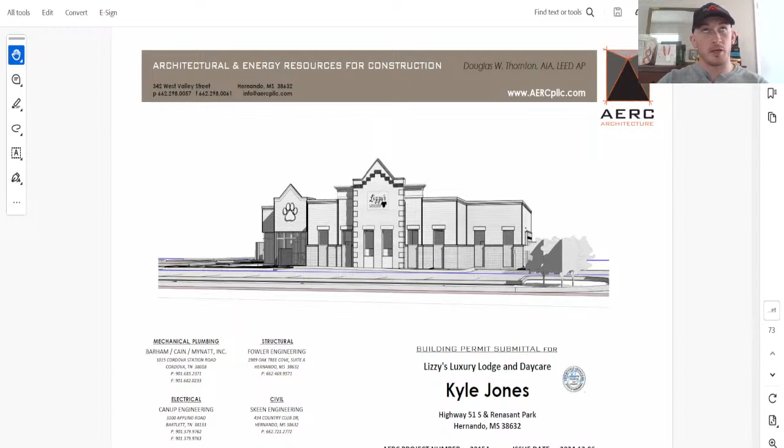All right, so we're going to be going over a live estimation. This is Lizzy's Luxury Lodge and Daycare. So if y'all don't know me, my name is Brad. I've been doing civil and dirt work excavation estimation for 5 years. I now teach everybody else how to do it.

So first thing we're going to do is we're going to go to our civil plans. All this stuff typically is relatively important, but not for us. So here's our existing conditions and demo plan. Let's just take a look around real quick. Doesn't look like there's a ton. It doesn't say anything about clearing or anything throughout here, so I'm just not going to worry about it.

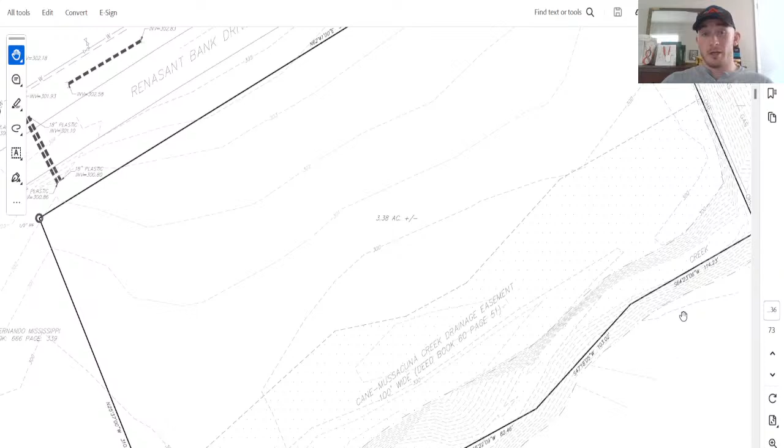All right, so here's where we can get into our first little bit of stuff. This is my site plan. And what I did already is I made some notes with this light duty concrete, heavy duty asphalt, all that kind of stuff, with how much base, because I don't do asphalt paving, but I'll lay all the base and stuff because I'll do all the grading.

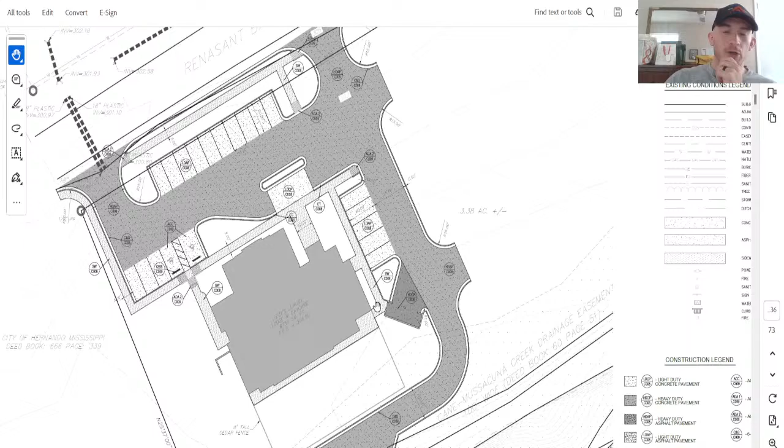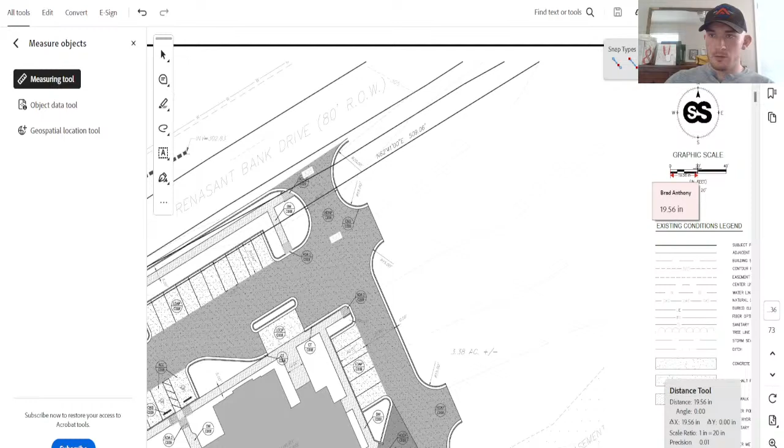So what I'm going to do, I'm going to find my scale. So 1 inch equals 20 feet. I'm going to hit my all tools and find my measure objects measuring tool. Change my scale by right clicking. 1 inch equals 20 feet. Let's go ahead and double check our measurement. 19.56, close enough.

All right, so first thing I want to do is I want to find the heavy duty asphalt, HDAP. So this says HDAP, so that's what I'm going to measure. I'm going to get to my area tool. I'm going to get a good little zoom in. And let's go ahead and trace. So this is just a quantity takeoff. I'm not going to be showing any pricing or anything like that, but if you're new to bidding off of plans, I think this is a very beneficial thing for you.

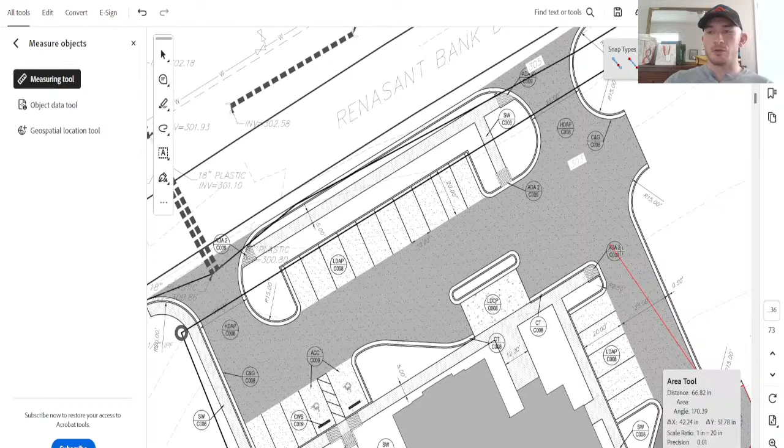So let's go ahead, just outline all this stuff. Oops, wrong way. Nothing remarkably difficult going on, but this is all the necessary evils to be able to figure out how to price a job. So I come here, I come across. So after we do this heavy duty asphalt, I think I remember it being 8.5 inches of base. So what we got to do is a little bit of conversions.

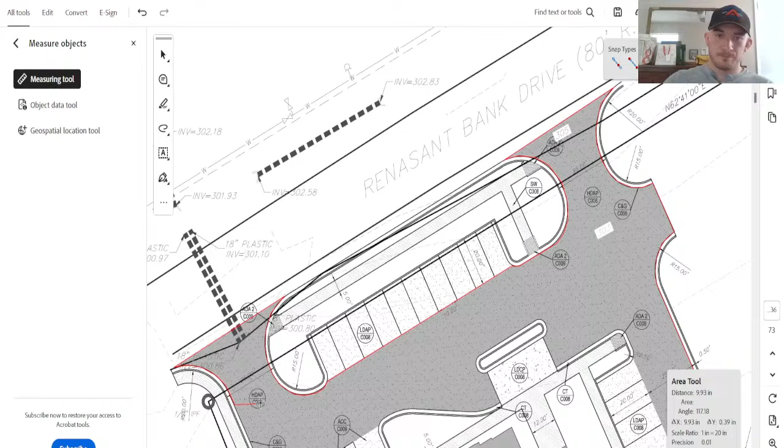Go ahead and follow this little concrete island. It doesn't have to be remarkably exact, but try and get as close as you can. Typically the drives are always heavy duty and then the parking spots are light duty. And connect. So we're at 16,450 basically. So I'm going to go ahead and take my pen, 16,450. Now, I'm going to pull up my calculator real quick.

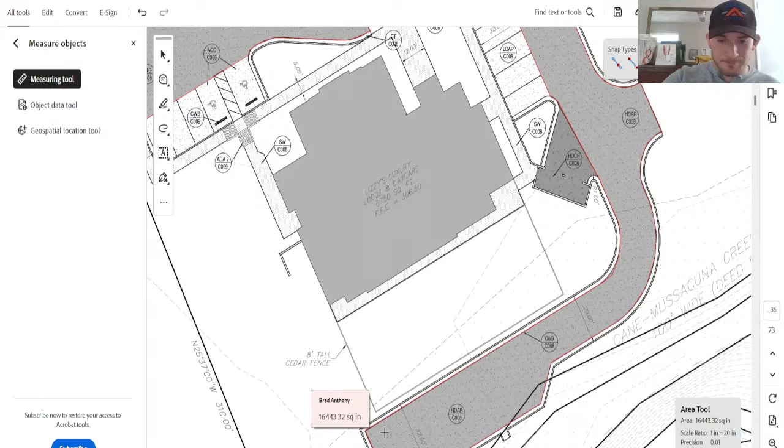Let's see, calculator. So 16,450. Now, I have it written down here that for our asphalt, it has 8.5 inches of compacted DGA base. So if you don't know what 8.5 inches is, I'm going to do 8.5, divide that by 12, because there's 12 inches in a foot and we have 8.5 inches. 0.708. So I'm going to do 16,450 times 0.708 equals this.

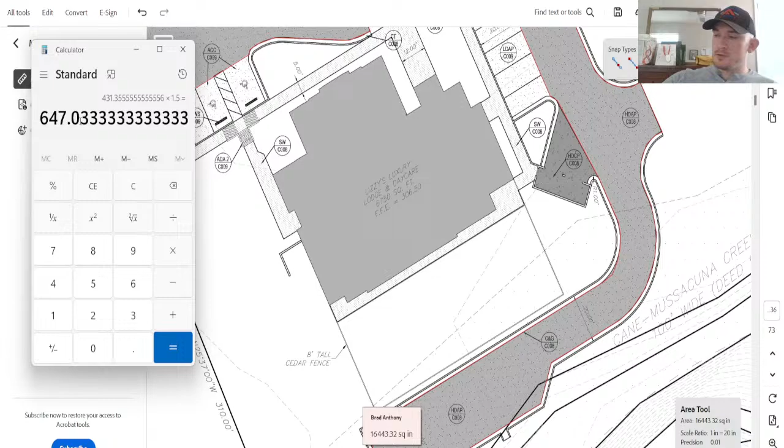Now this is my cubic feet because we have length and width throughout all of this. I'm going to divide by 27. That's going to give me my cubic yards. Now, we have to hit a compaction percentage. So with typical crushed stone, I use about 50% more. So I multiply by 1.5. So I'm going to need about 647 tons for the heavy duty asphalt. So I'm going to go ahead and make a note, 647 tons, HDA.

So now we just do the same thing. I'm going to go back through, I'm going to find all these light duty spots, and I'm going to measure them out.

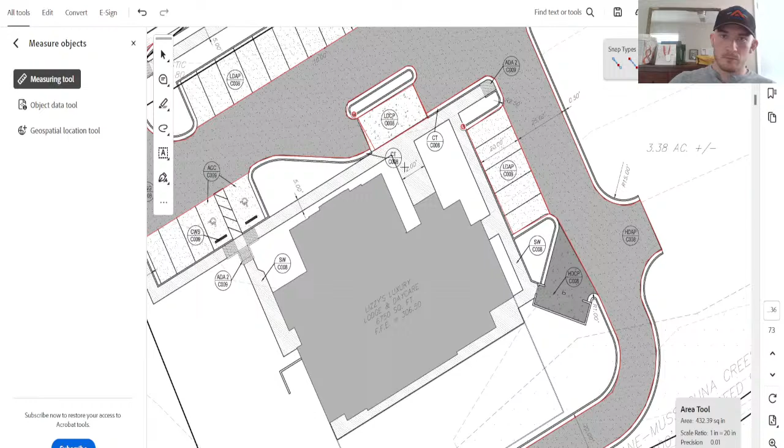Light duty concrete paving. I missed a little bit on here, but that's okay. Some of this ADA stuff gets a little bit complicated because they want you to have real specific compliance stuff, but I don't typically worry about it because that's something that I can figure out in the field. So you can see I'm going a little bit into this curve. I don't think it's going to make that big of a difference.

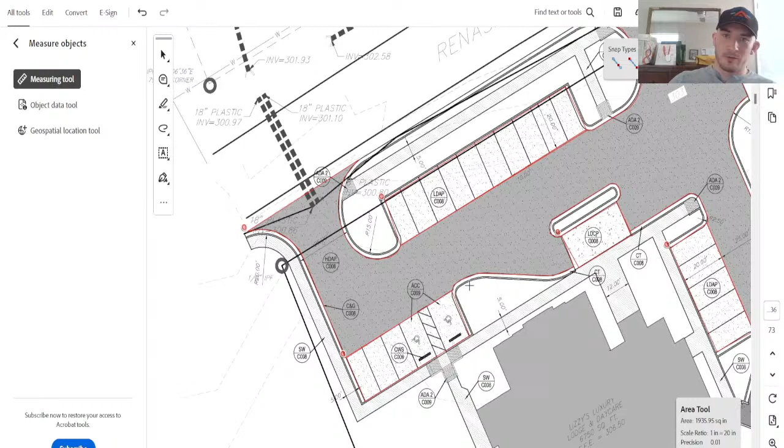Looks like that might be all of our light duty. Yep. So now let's go back, hit my pan. So I'm going to go 1935, 1935. This one I'm going to put to 450 because I missed a little bit, so 450 square feet. I'm going to round up to 930, and I'll come over here, 1110. So again, I do everything the same. Pull up my calculator again.

So I got 1935 plus 450 plus 930 and 1110. So now this is 8 inches. So I'm going to multiply that by 0.667 because that's my conversion factor. I divide that by 27. And again, I multiply by 1.5. So I get 164 tons. So 164 tons for light duty asphalt. Oh, that's concrete. My apologies. I'm going to go ahead and scratch that out and put light duty concrete paving, LDCP.

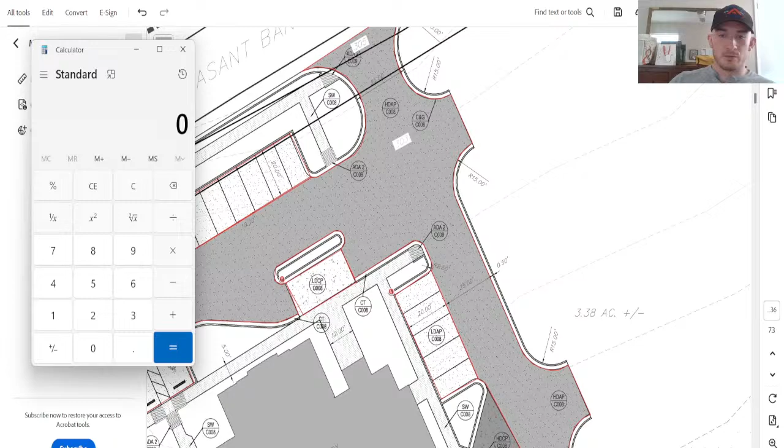I see. So this is concrete. This is asphalt. This is asphalt. This is asphalt. So I just removed my 450. So let's do this again. My apologies. So I got 1935 plus 930 plus 1110, 3975. So this is my 1935, my 1110, and my 930. Now I multiply that by 0.667 because 667 is 8 inches out of 12. Divide that by 27 and multiply by 1.5. So we have 147 of light duty asphalt paving.

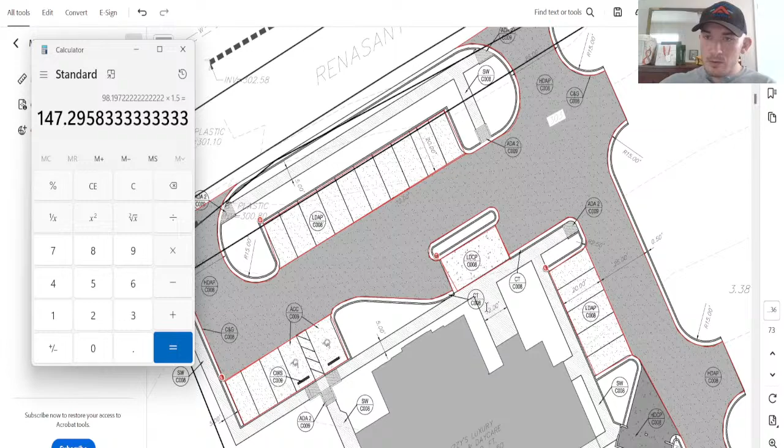Well, since we're here, I can do my light duty concrete. My light duty concrete has 7 inches of base. It looks like this is my only section because this is heavy. So, well, yeah, because that's sidewalk. Sidewalk's probably got a real specific spec. Yeah. And I remember sidewalk doesn't have any base under it. So let's just say that's 450.

450 times 7 inches. I forgot what 7 inches is, so I'm going to clear it. I think it's 517. 7 divided by 12, 583, yeah. So I can multiply that by 450 square feet, divide that by 27. Again, multiply by 1.5 as a conversion factor. So I need about 15 tons for light duty concrete paving.

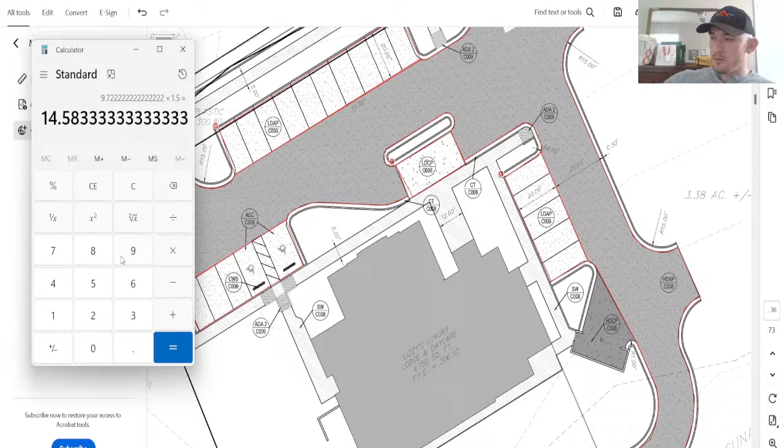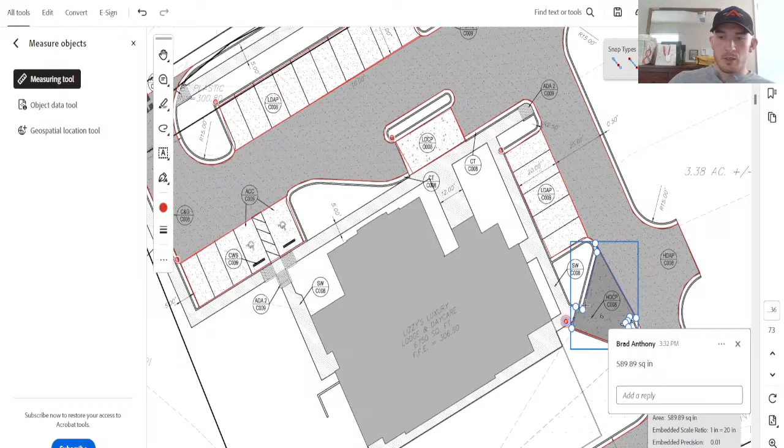And then we hit one more measurement real quick for this heavy duty concrete. This looks like a dumpster pad. Boom, boom, boom. So what is this? About 590 square feet. So again, hit my 590 square feet, multiply it by 7 inches, which is 0.583. Divide that by 27, multiply that by 1.5. I'm at 19 tons for heavy duty concrete paving.

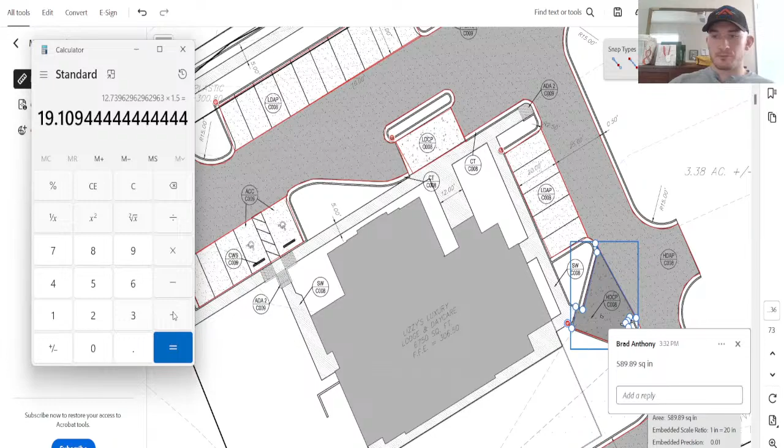So immediately on our site plan, we've already knocked out a pretty good bit of material, because when I'm doing all of the dirt, I want to be able to lay all of the stone too. Now, secret for me is in my bid and my exclusions, I put that I'm going to put it as close to 8 inches as I can, but the final grade has to be done by the pavers. That way I don't have to come in and worry about really cutting everything specifically to how they want before they even get there. It's easier if you just let them do their finals.

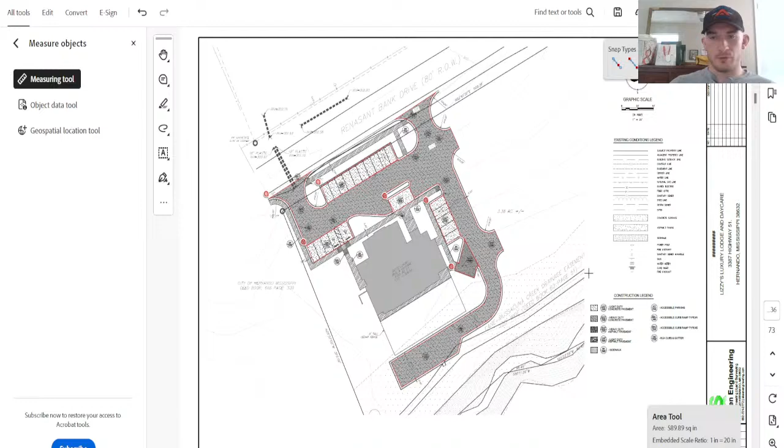All right, so to keep moving, I'll go back to my pan. Down here at the grading and drainage plan. This is when stuff gets interesting. So I'm not going to do a total dirt takeoff, but I do want to notate all of the stormwater materials. So I'm going to go to my draw tool. I always just use this purpley pink just because it's easy for me to see. And I just want to highlight what this is.

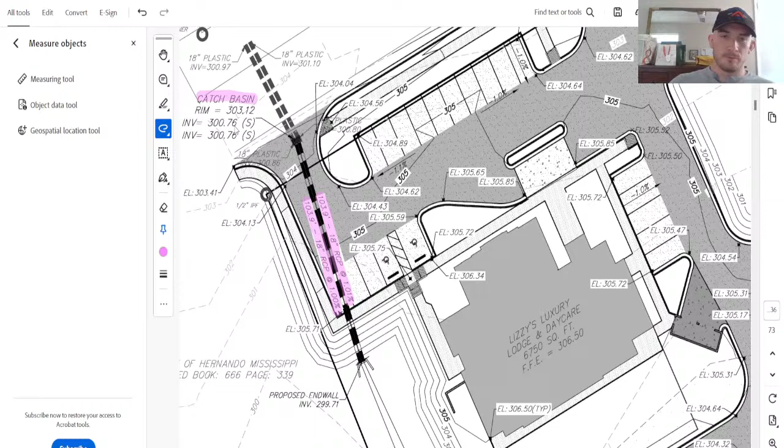So this looks like 2 sets of pipes, because we have one here and one here. It doesn't look like one individual pipe. I'm going to assume that it's 2. So again, right here we have a catch basin. If we want to figure out what our elevations are, my rim is at 303.12 and my invert is at 300. So it's roughly 2.5 feet. I'm going to say it's more like 3 because there's going to be a base below this invert. So you have roughly a 3-foot catch basin. We have an end wall that we got to tie into. It looks like this is some kind of ditch that's going to drain down to here. Yeah, these look existing.

So it looks like it's just the 18 inches. Is there another inlet in the curb or anything? It doesn't show one. So it looks like this just goes straight out. There's an area inlet right here. It's probably plastic, and then we're just running 18 inches of RCP.

So for my notes, I'm going to go 104. I'm just going to round up, 104 times 2, 208. So I go 208 linear feet of 18-inch RCP, 1 3-foot catch basin. And I'm going to imagine that that's going to be a yard inlet because it's got a grated top, but it's going to be a double.

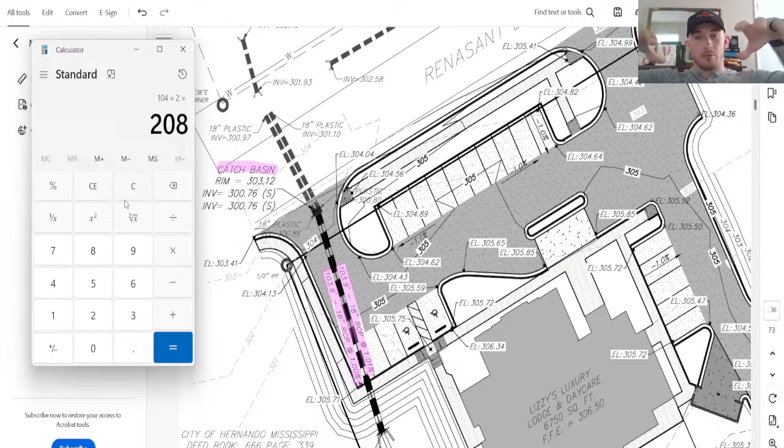So double yard inlet. And the names of things are going to vary, but typically yard inlets are like the metal grates with the slats on top that you set them on and the water can run into the grate. Now, I don't see any other stormwater materials in here. Yeah, it looks like just a bunch of grading.

But again, I'm not going to do the dirt takeoff entirely for this, but I will do some more in the future. So let's just keep moving through here. We knocked out what we needed to with this. It doesn't look like we need any joints or anything, just straight up running and gunning.

So here's all of our utilities. So again, I'm going to go ahead and notate all of these. That way, if I ever have to go back through the plans, I see everything very easily. We have fire hydrants, 8-inch C900, so that's water, 4-inch C900 water, 2-inch water service, 4-inch sewer service, manhole.

Again, right here. So my invert is at 292, my rim's at 306, so that's a big manhole. I mean, that's like 14.5 feet. Siamese Fire Department connection, C900, 4 inches, water meter, 8-inch C900, and another hydrant.

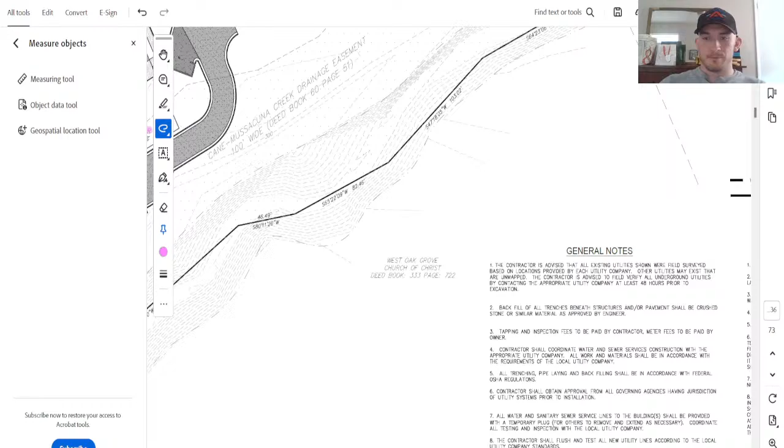So they didn't give me the measurements on these, so I'm going to have to do a little bit of measuring from it. Again, it's not really anything remarkably difficult. I want to find my scale again. 1 inch equals 30. That's why you always check your scale, because it's different than the site plan. 30. I had this in inches. I need to put it in feet. Still works the same. So I'm going to do this water line first.

I'm going to go to this perimeter tool because it lets me trace lines and then make like joints with them. So it looks like my water comes out to here to a hydrant assembly. That's 8-inch C900. I'm going to run down to here. Here's my other fire hydrant. I'm going to double click. Now I also have to connect to this existing 8-inch water main. So I'm going to run this to here. Connect.

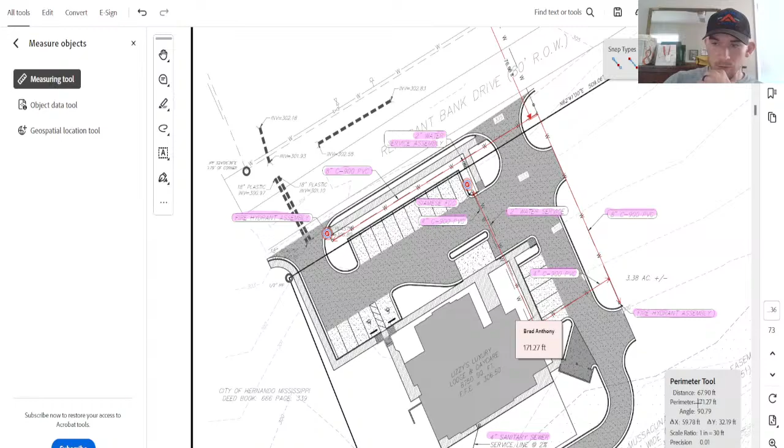Now, before I tie into anything else, I've got a Siamese Fire Department connection. This is 4-inch water. So I'm going to run my 4-inch water down to here. Looks like it ties in off of this 8-inch, 171 feet. Now zoom in, get a good look real quick. So we've got the C900 going right here. And we have another one that's going to tie in. I'm just going to run it parallel to here because we kind of flubbed both of them, but that's okay. It's about 105 feet.

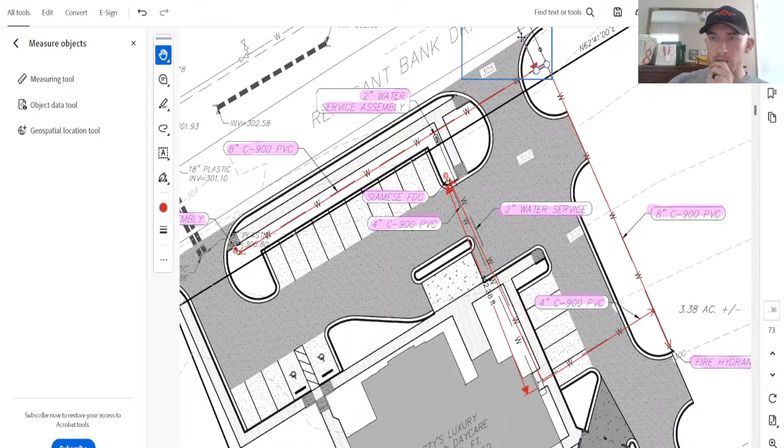So now again, I pull out my notes. I'm going to go ahead and do 8-inch C900 for my water. Going back towards my pan tool, 330 linear feet. And then I want to come and add my 77. I'm going to round up to 80 feet. And that's my 8-inch C900.

Now when we come off of this fire hydrant, we're turning into 4-inch. So we have 4-inch, 4-inch. And I've got 102 and 170. The 170 is this U-turn though. So I'm going to do 4-inch C900. I'm going to round that up to 180 feet of C900. And then for our second line, I'm going to go 105 feet of 4-inch.

Now our sewer, we just measure out our sewer real quick. Do we have to run this line all the way out? Looks like it. 390 feet of 8-inch PVC. That's good. And then 4-inch sewer. Let's just check the measurement on this 4-inch real quick. So we got 4-inch sewer. It is, let's just say 55 feet.

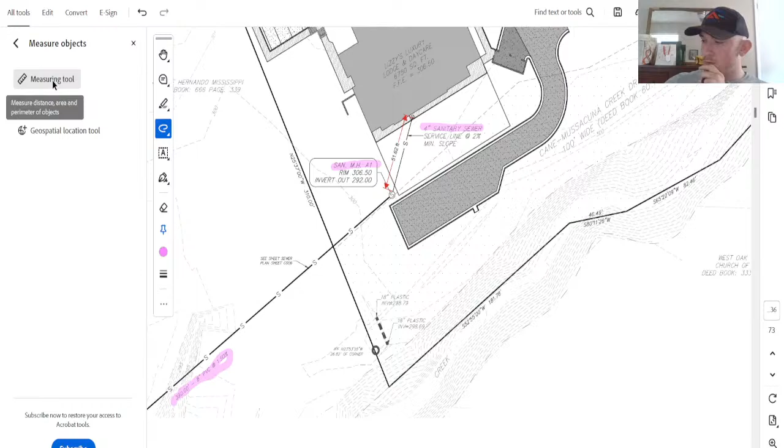Then we have 8-inch sewer. And it says down there 390. I'm going to go ahead and highlight that because that's kind of tough to see. Don't mind my incredible highlighting skills. 390 linear feet. Now let's go ahead and make sure we knock out all of the other things encompassed in the utilities, like the fire hydrants.

I see. I read that wrong. Oops. What's my length on this one? So I need to change that to a 2-inch water service. So that's 80 feet, 2-inch water service. That's why you pay attention and you highlight.

So we got our hydrants. Let me get my water meter assembly. Water meter 1. Looks like we're going to have some joints coming off of this. So there's going to be a T right here. There's going to be a T right here.

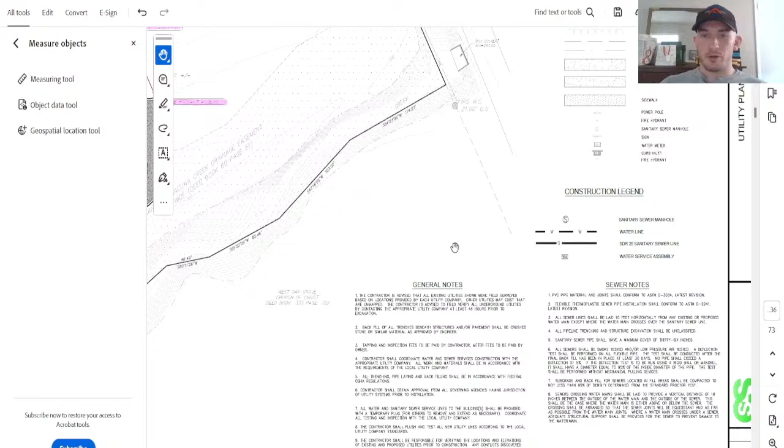So before we run away, I just want to run through the notes and make sure that there's not anything just particularly weird. Backfill all trenches with crushed stone or similar material beneath structures and/or pavement. So this is a big one. That means that when you dig the trench and you set the pipe in, the material above that pipe has to be crushed stone, which means the price of doing this pipe is going to be very expensive because you have to backfill with the stone, import it, you have to get rid of the dirt that gets dug out. It just costs way more money.

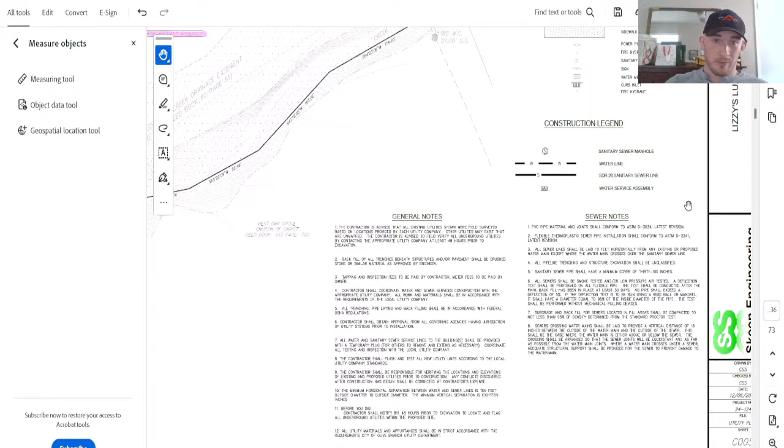Tapping and inspection fees paid by the contractor, water meter fees paid by the owner. Makes sense. Testings. 10-foot distance, 811, easy. ASTM, so it's probably going to be SDR 26, which is like a standard pipe around here for us. Thermoplastic sewer, yeah. Minimum cover of 3 feet, very important. I mean, that pipe down there is going to get really far in the ground. All right, yeah, I think we knocked it out. Here's the rest of this.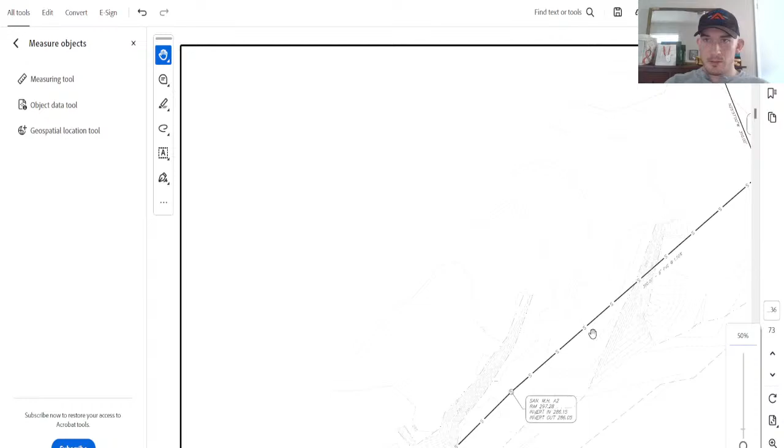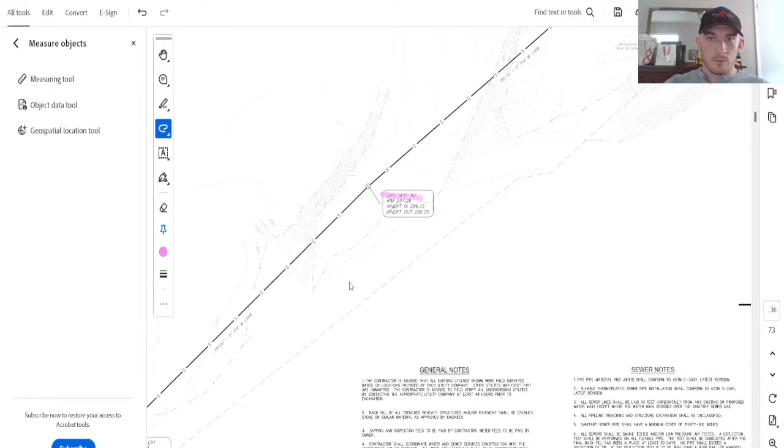So it looks like, yeah, that's our first manhole. We have a second manhole right here. So let's do, it looks like 3 manholes. Let me just go ahead and highlight through this. Yeah, 390 feet total. So this one is about 11-ish. 11 foot 3 inches. And then this one is about 10 feet. Almost 11 feet. Yeah, about 11 feet.

And 11 feet. So to calculate this, we're taking our rim, which is 294.89, and we're looking at our invert out, which is going to be our lowest point. But there is still a base, so the invert is typically higher because it's in the manhole, right? So the base underneath it is something that typically gets measured, but it depends on the manhole. I'm usually going to account for about 8 inches. So you'll see me plus or minus roughly a foot.

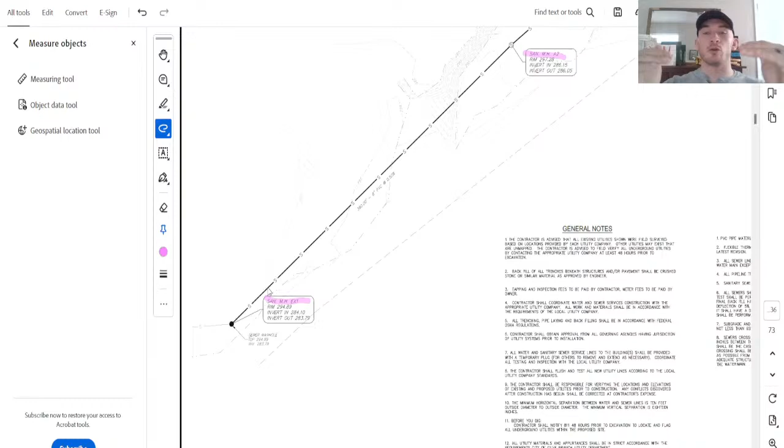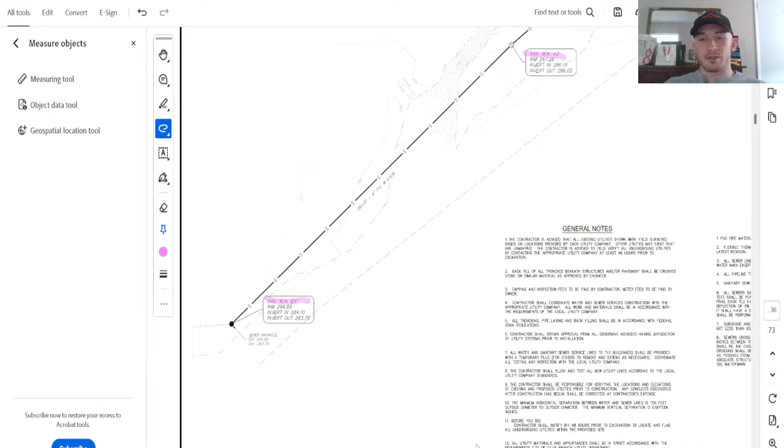That way if I overestimate, it's easy for me to build it back up with stone. But if I underestimate it, it's hard to get a bigger manhole without spending a ton of money. So typically I drop this down to like 282, jumping up to 294, and that'll get me about 12 feet. It's just the rough estimation part. All right.

We're back down here. This is our erosion control plan. This is a good one for us. Again, I'm going through, I'm just highlighting the stuff and making notes as I go. Temporary construction entrance, silt fence, 5x10 riprap, easy. This looks like a wattle. Yeah, wattle ditch check, wattle ditch check. Some riprap. Seems like everything. Do we have sod anywhere? Looks like this might be sod, these slopes.

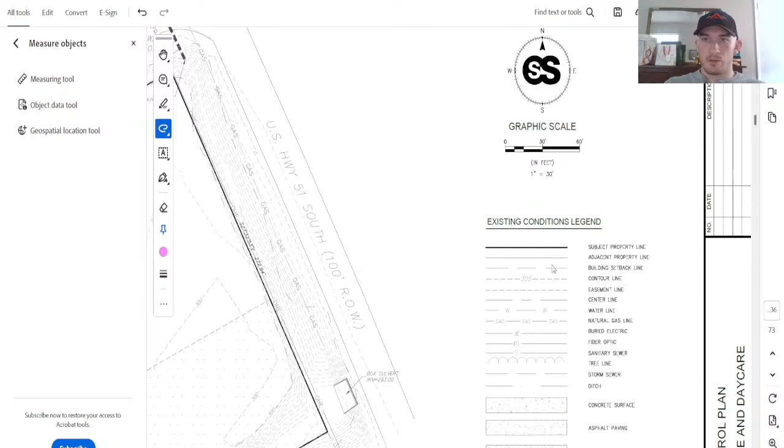Inlet sediment barrier, so there's got to be one up here. Yep. I would imagine that this is all encompassing of sod. I'm gonna treat it like it is. It's probably in a note somewhere. All right, well, let's just count them. So we got 1 wattle, 2 wattles. That's it. So I'll go 2 wattles. 1 inlet protection. And then let's measure out our silt fence.

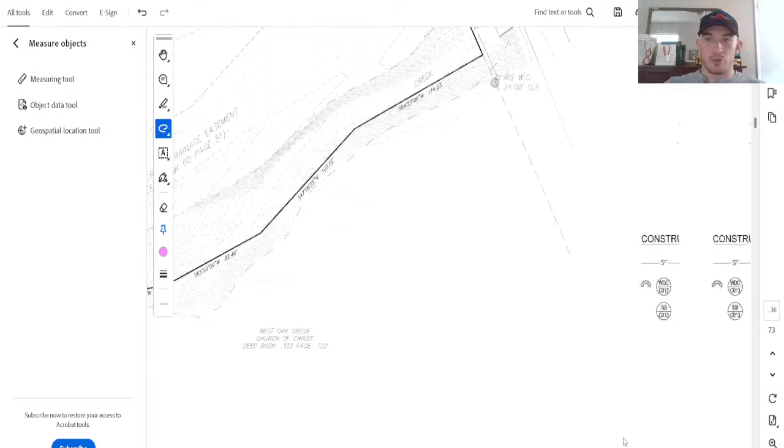Let's make sure our scale is correct again. We're at 1 = 30, measuring tool. 1 = 30. So now we hit our tracing. Again, I'm doing straight lines with turns, so I'm using the perimeter tool. Let's just run through it and knock it out.

It's about 670 feet of silt fence. Again, 670 linear feet silt fence. We got our inlet protection, we got our construction entrance. So one construction entrance, easy.

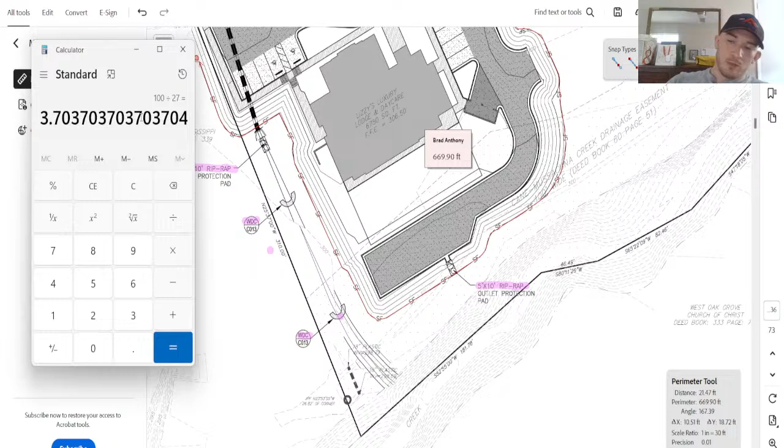We got 5x10 riprap. So let's knock out the riprap. So we go 50 square feet times 2. It's 100 square feet. Divide that by 27. And now look, we're going to multiply by 1.8 because riprap is not like a remarkably compactable thing. It's just big stones. So it's not remarkably dense, so you have to use a lot of it. So that means we're going to get about 7 tons of riprap.

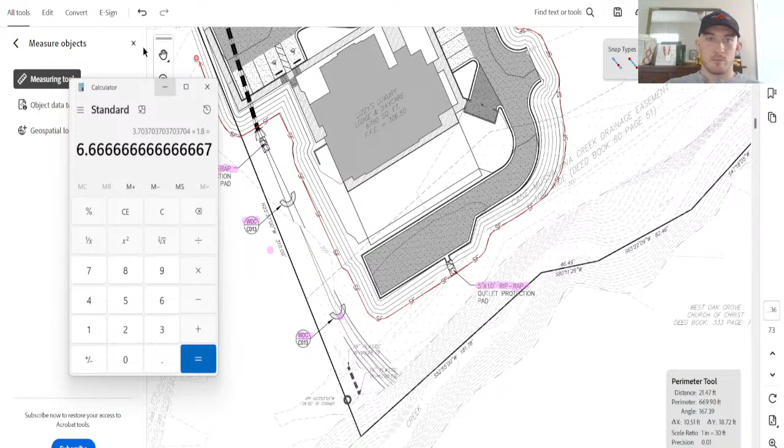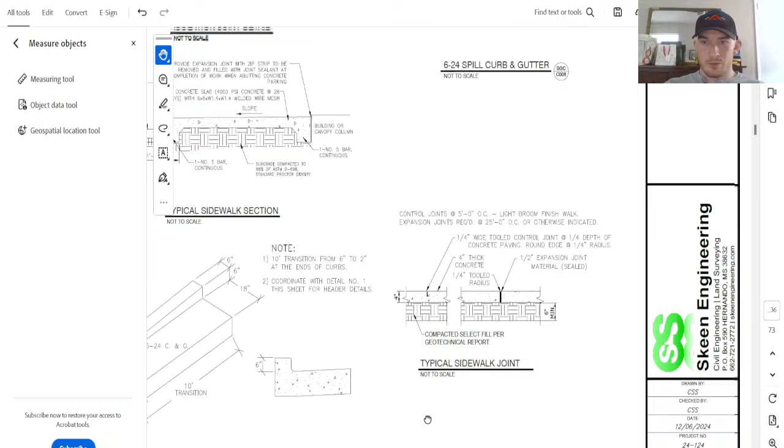Let's just go ahead and check all of our details real quick. So this is the kind of pre-work that I did. We got 8.5 base, 8-inch base, 7, 7. We got some concrete wheel stops in here, nothing really super serious. I should probably get the curb and gutters.

These are all of my signs, my ADA ramps. Storm pipe, flexible, flexible, concrete. We're using concrete pipe, so we want to do this. This is a really, really important one. Yeah, so this is that yard inlet with the square grate. That's what I was talking about.

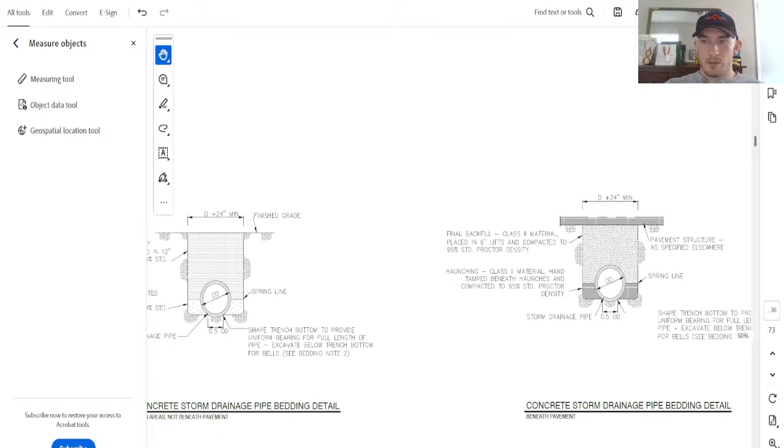Final backfill, previously excavated material. This is what we need though. Class 2 material, because the majority of this is under pavement. So if we go back to here, right, or is it this one? There we go. So the majority of this is under asphalt.

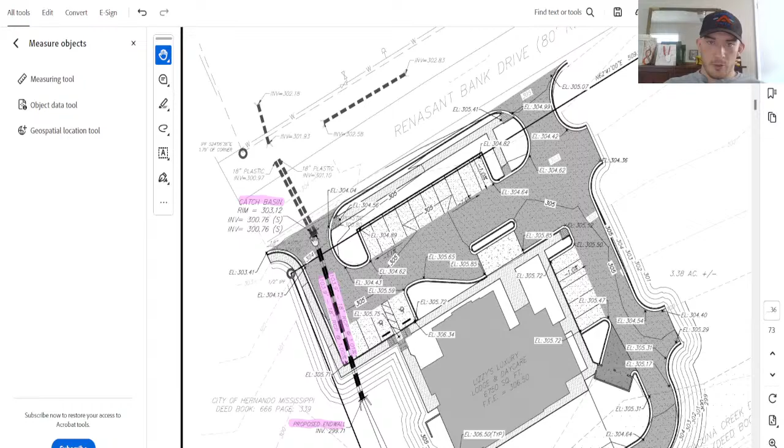So I'm going to go ahead and measure. What's my scale at? 30. I'm going to go ahead and make a measurement from here out to here. So it's about 88 feet. Let me make a note real quick. 88 linear feet. And it has to be compacted with 3 feet above the pipe.

Now, this is when it gets cool. I'm going to go ahead and pull up my estimate template.

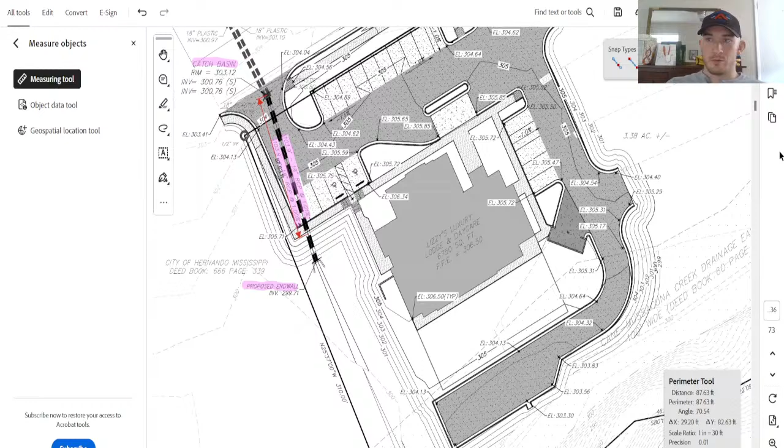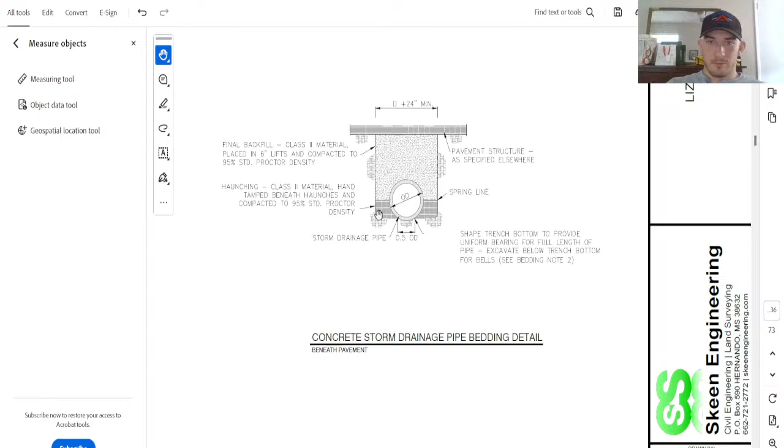So look, with my pipe chart, I'm going to do 88 feet. My trench width for 18 inches, I'm probably going to do a 4 foot. My base, let's go ahead and check our base. Let's go back down to our detail. Get my pan tool real quick. Look, our base right here, hand tamp beneath haunches and compacted. So this doesn't really tell me exactly how much it is. Typically it's about 6 inches. So I'm going to assume that it's 6 inches.

So I go back to here, my base depth in feet is going to be 0.5. So what's cool about this is if you don't know what 6 inches is in feet, I can put 6 inches right here and it'll tell me how much it is. So if it's 10 inches, I would put this number right here. Easy money. Let me go ahead and put this back to 6. Now my pipe size in feet. So this is 18-inch RCP. So again, if I don't know what 18 is, I can do that. This is 1.5. I put 1.5 right here.

My backfill height, I have to go 3 feet over the top of the pipe. So I go 3 feet over the top of the pipe. My compaction percentage, I'm going to lose about 20%. So I get this much. So my backfill tonnage for the 88 feet is going to be 55 tons. Does that make sense?

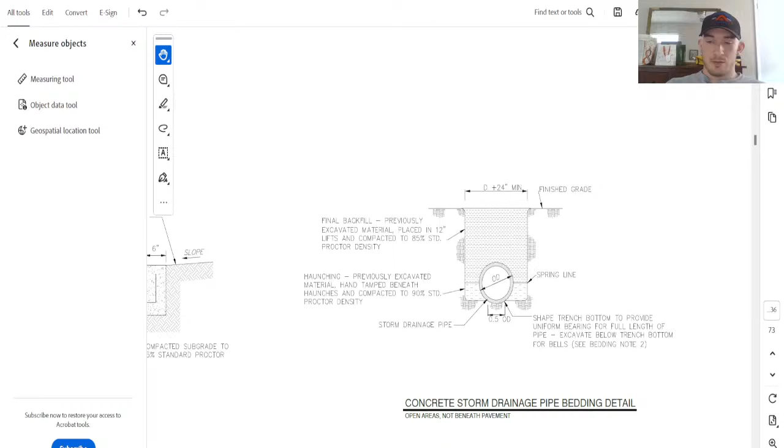Now what's different is with the pipe that does not go under the asphalt, we don't have to do 3 feet of backfill. So if we come back to here, we can backfill just with dirt, with excavated materials. So out of the, what was it, 108 feet, we have 20 feet where we can just fill this back in regular how it is. So this number right here is going to be a little bit less. I'm going to make this about 70 tons for the pipe. 70 tons, 610 for pipe. So this gives us how much we need for our base. So we need 10 tons to cover just the 6 inches of base under all those pipes.

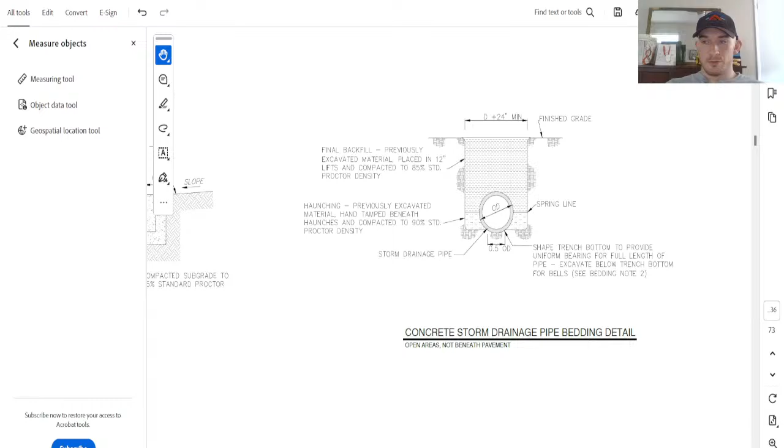Now let's do the same with all of our water and plastics. So here's our pipe sizes and what kind of thrust blocks that we need. So a thrust block is basically like when the pipe makes a turn, I want to put concrete behind it to make sure when the water's going through pressurized, it doesn't blow out of the corner. So you can see right here my concrete thrust block. This is just my concrete right behind that joint, making sure that that water doesn't fly out of there. Same thing with all of these.

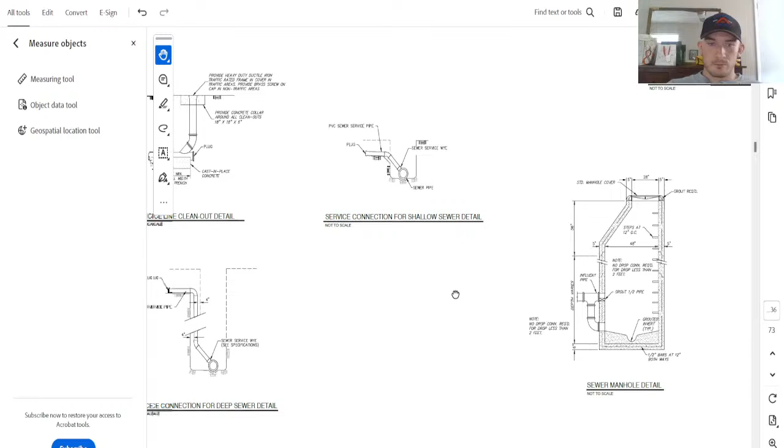So with these sewer mains, I got concrete straight underneath the pipe, goes up to the spring line of the pipe. Spring line's basically halfway up the pipe. Here's our service connection. Plugs, runs in, ties into the Y. I mean, it's real straightforward. Here's our deep sewer details. Here's our manholes. I just want to make sure none of this is weird.

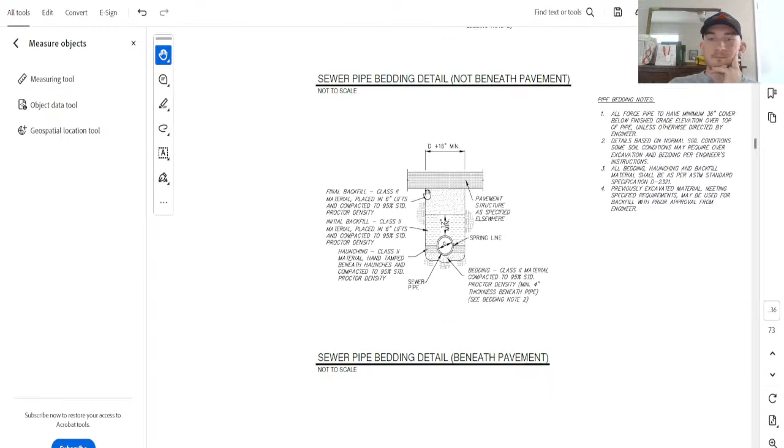Sewer pipe beneath the pavement and not beneath the pavement. Again, these are really important. Sewer pipe beneath the pavement: again, you're going to see class 2 backfill, which is stone. Final backfill, class 2 material, which is also stone. So this is probably going to be clean stone, like a 57 size stone, which is 1 inch clean stone. This is probably crushed stone going to the top. But again, we see right here, we have to go clean stone over the top and then dirt over the top. So again, you have to check whether you're going under the roads.

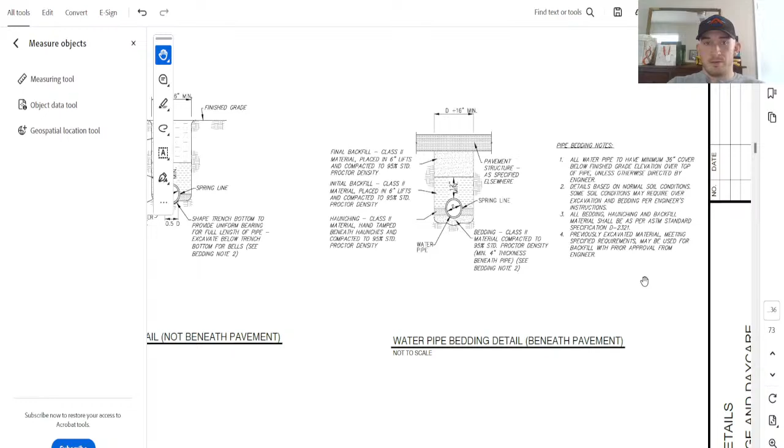So let's go back up to our site plan or utility plan. Here we go. Again, our water only crosses in one section or 2 sections. Our sewer doesn't cross at all, so we're safe on the sewer. But the water, we do have to assume a little bit more. So let's go back down to our detail page. So look, water pipe bedding beneath pavement: "36 inches of cover below finished grade." So look, I'm going 3 feet up over the top of that pipe, at least. So let's figure out what that length of section was for that water line that crosses the asphalt. Then we can figure out the rest.

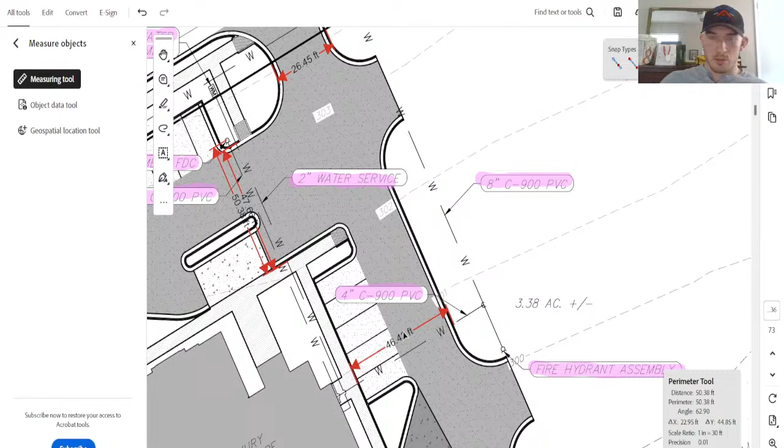So since I have all of these already written down, I can go ahead and delete these. And now we go back, we hit our measuring tool. So we have from here to here, 26 feet. From here, let's just call it to here, 46 feet. Then we have water tying into this meter, 2-inch water coming all the way over into my service. Let me zoom in, I can't really see too well. Coming into my service right here. And then we have the fire department connection coming across to right here. So let's add these together: 50 plus 50 plus 46 plus 26. So we got 172 feet that we got to backfill all the way up.

So again, if I want to be lazy, I can come into my pipe chart. I'll make those 172. My trench width's probably going to be 3 feet on this because the pipe's not super big. My base, I'm going to still stick with 6 inches. Backfill height's 3. Pipe size, I'm going to put them all at 8 inches, so 0.667. Compaction percentage is 20%. So we're going to need 115 tons just to do that one section. So I'm going to do 115 tons for asphalt water.

And then for my 172, I want to figure out how much of that comes off of all of my water. So minus 330 minus 80 minus 180 minus 105. Make that positive. So we got 523 feet. 523 feet, 3-foot trench, backfill height 1 foot over the top of the pipe. Pipe size still 8 inches. Base depth half. We're doing 188 tons. So we got 188 tons for non-asphalt water.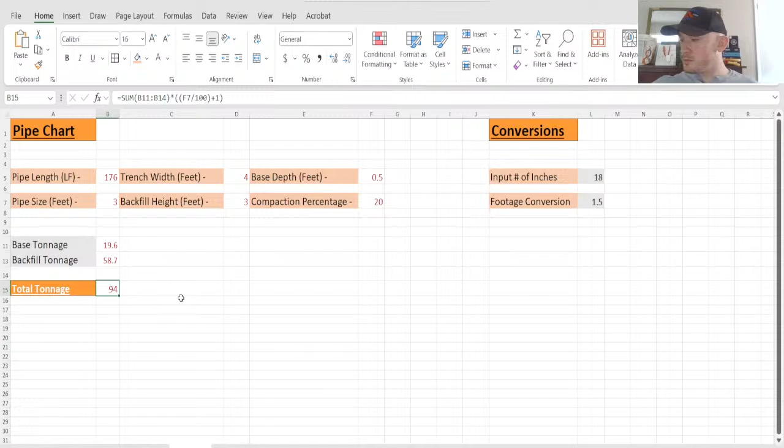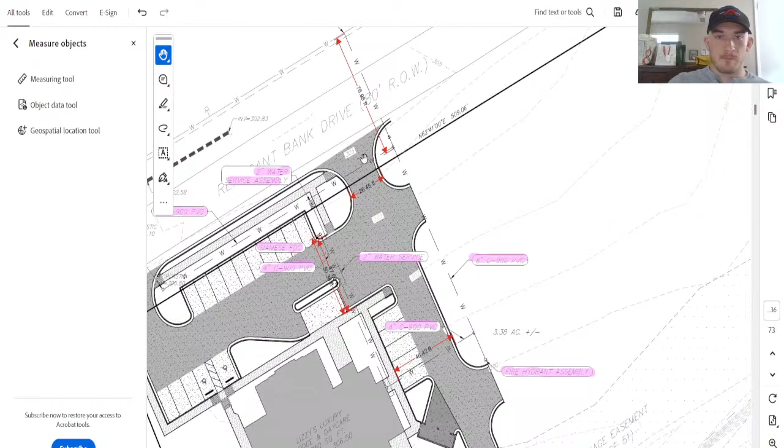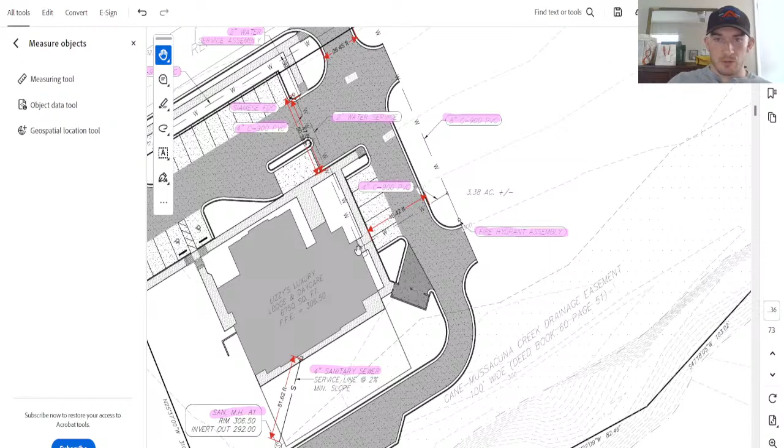So back to our plans. We've got all of our bases, we've got everything figured out. For our concrete, we just have to figure out what we need based on what valves and joints we have. So we have a T right here, so we'll need concrete for that. We got a T right here, we're going to need concrete for that. That's a 2-inch turn, 4-inch. So it's a 4-inch 90, a 2-inch 90. So 1, 2, a T, a T. And it looks good. So we hit all of our bases, we hit all of our connections, we got to get all of our joints. All that stuff's pretty easy.

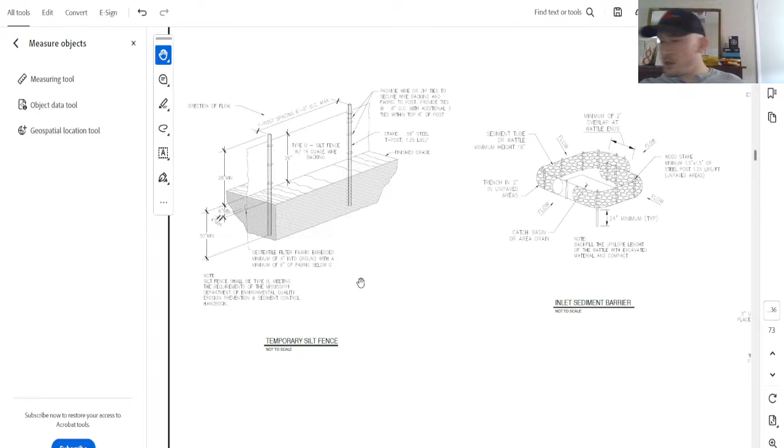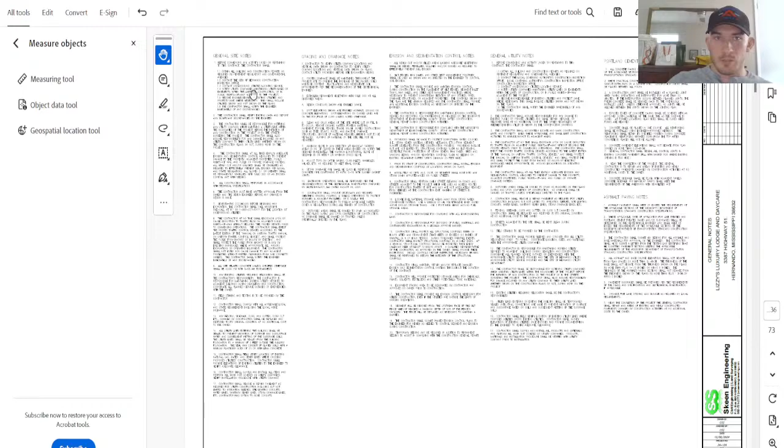Let's check all of this silt fence, wire back silt fence, very important. Let me go ahead and write that down. Wire backed. Construction entrance, these are all basically the same things. And seems like we have wrapped up minus the dirt takeoff. Again, run through all these notes and make sure nothing's really going nuts with them. Seems pretty straightforward. Now the only step that's left is tying this into here.

So I'm going to make my first item mobilization, 1 lump sum. Now I try to group everything based on kind of what they're used for. So I'm going to do base tonnage, base rock. Now let's add up our numbers. So I have 647... 845 tons.

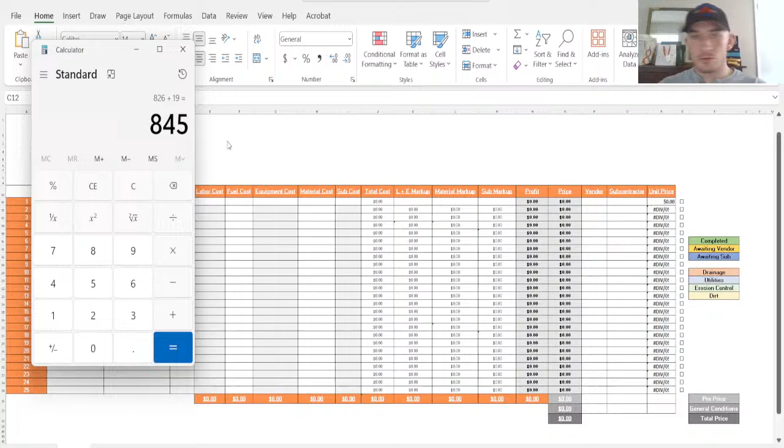Tons for my base rock. Let's go 18-inch RCP, 208 linear feet. 18-inch head wall, 1 each.

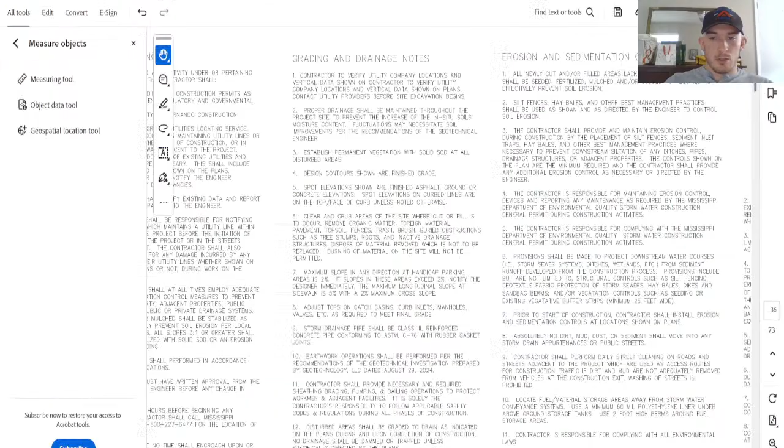Now I want to go back and double check something with this grading and drainage plan. That catch basin, that's what it was. 18-inch catch basin. Double 18-inch catch basin, 1 tie-in to existing.

So the tie into existing is there's already plastic pipe coming in, so we're replacing that catch basin, and we still have to butt that pipe up into that catch basin and then run our pipes out, and that costs money, so I'm going to charge them. So let's move on to our next pipe.

Let's go 8-inch C900, 330 linear feet. 4-inch C900, 80 plus 105 is 185 linear feet. Flow line, linear feet. 2-inch water service, 80 feet.

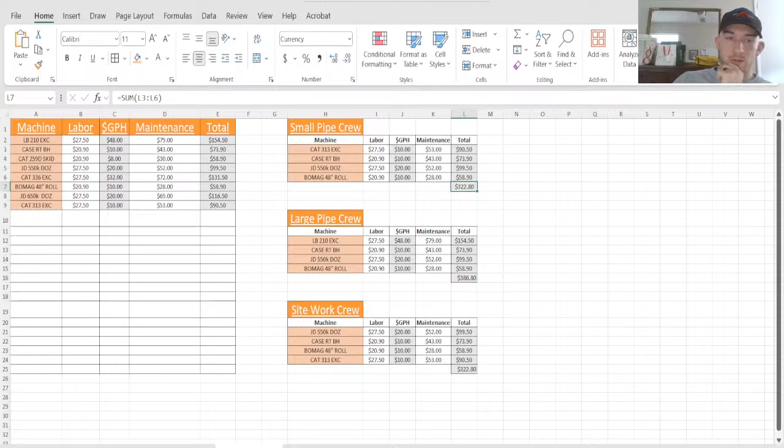So I'd come back here, I'd do $322.80, and I would multiply that by how many hours I think it would take them to lay 208 feet. I know my guys can lay close to 500 feet of 18-inch in a day. I'm going to give them 1 day, so 10 hours. Actually, no, I'll give them 6 hours to do it. So I press 6.

My conversion's not going to work. 322.8 times 6, 1936.8. So now this is already giving me $13.97 with just my labor price. The markup's 35%. You can boost that up to 50% if you want to. I'm making $900 on $1,900. It's pretty decent to me.

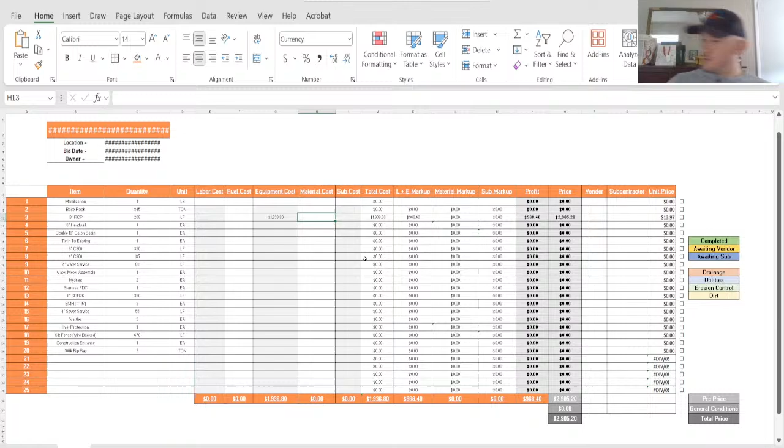Your pipe cost is typically going to be about $27.50 a foot, minus the rock. So on my 18-inch, we're going to need about 108 tons. Let's just say we're getting it for $36 a ton, so 3888, and then plus 27.5 times 208 feet, 9608. So now we're sitting at $67.09. That's with a 15% markup on the materials. So I'll make 24 on 11, which most of it's just material costs, so it's not really that terrible.

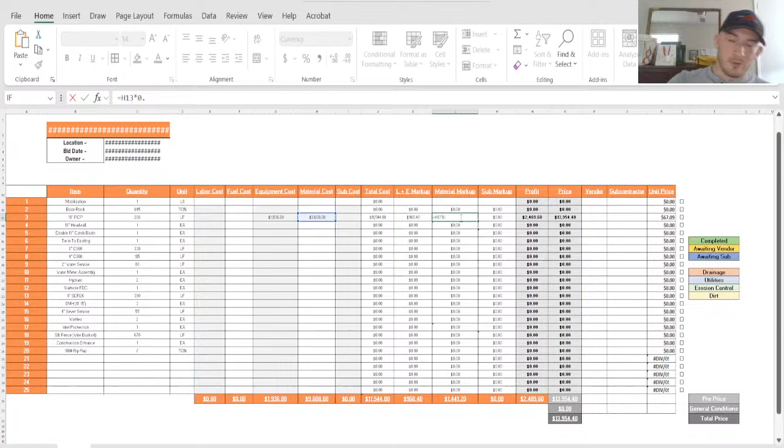I can put that to 2. I make about 3 on 11. So that's going to hit you roughly that 30% profit. Your efficiency value could definitely be higher. I can make this a little bit more because I know we're not going to be laying a ton. $70 a foot, that's probably going to be okay. I'll make 33 on 11. So all of this is just plug and play.

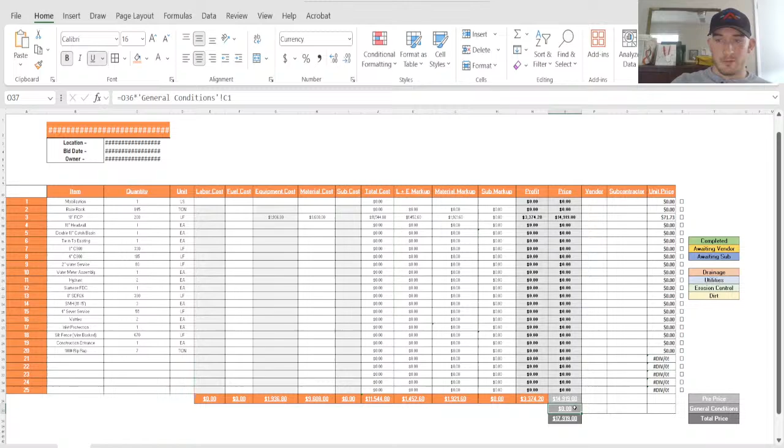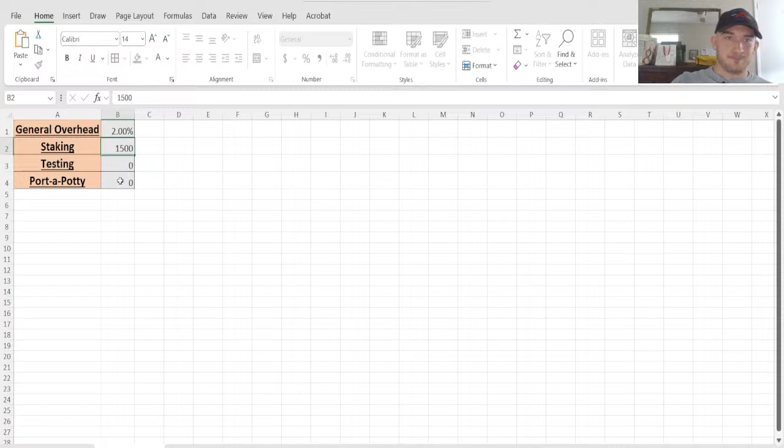If I come through here and I want to add my 2% overhead, say my staking, I'll put $1,500 in there. My testing, $1,500, and my porta potty, let's just put $250. You'll see down here, we start to increase in our prices. So we've got 3,000 extra, should be 3,200. Yeah, these all tie in. It's all very applicable, very easy to use. It's all plug and play. I tried to make it as simple as possible for everyone.

Again, that's this job taken off for you.